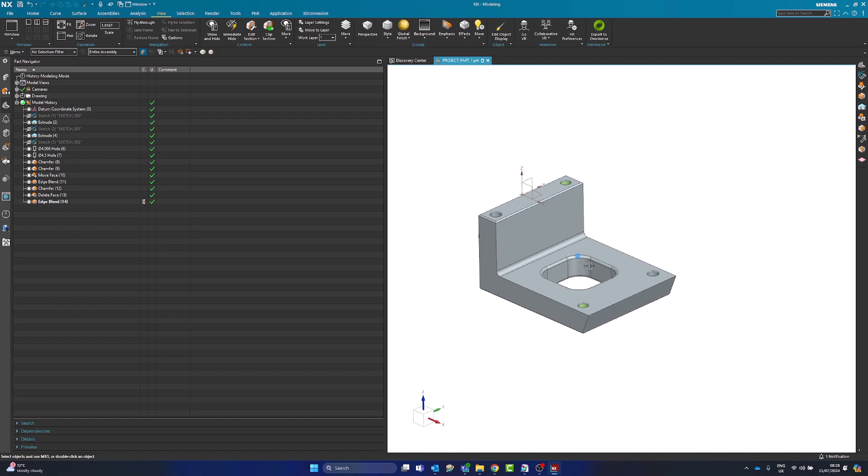And this is going to be a part that you're going to download and you're going to program completely on your own. There's nothing on this part that you haven't learned already, I believe anyway. It's relatively simple. It comes with a drawing. So if we download the folder from the OneDrive or Dropbox, sorry, then you'll see this information. So we have the main part, .prt.

If you're using NX2212 or above, then you can use this one, which I'd always recommend. And if you're using an older version of NX but are still following along with the course, then you can download the step model here and you have to import that into your session. Along with that, we have a drawing. So let's just give this an open. You can see there's a few things to look out for on here.

This hole here is datum A, and it's a 4mm H7 hole. You'll have to look up what H7 means if you don't already know, and see what tolerance that is. And then you'll see this hole here is also a datum hole. So it's 2 off, so this hole and this hole are 2. This one's not a datum hole, but it's a H7 hole, and it's referenced back to this hole. So you can see this has got an 025 positional to datum A and B.

So B is this bottom face. So basically this wants to be nice and parallel, perpendicular to the face. And then it also wants to be very good positionally to this hole here. So you'll have to go away and decide how you want to do that. And then other than that, there's not that much on here to worry about.

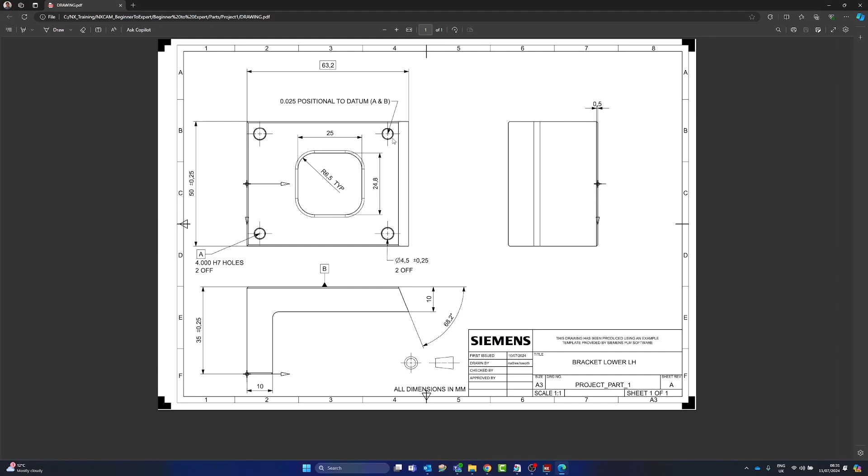And then this tolerance here that you can see in the box, this is just a reference dimension, because you can see this is actually a chamfer here. So this is just picked to the end of the chamfer. That's just there for reference basically. And then the other interesting thing here is I've added some project information. So if we open this up, a little text document, you'll see that I've just put a bit of information in here to try and simulate the differences of what could happen in reality.

So we have an order quantity of 200. So we're going to program this in a way that we are potentially running 200 of them. So that's something to bear in mind. Because if I was programming a one-off, I would probably program it differently than I would if I was doing a 200 off. You can get away with a little bit more in sizing and stuff like that if you have to size anything.

The machine that we're going to program for is a good quality 3-axis vertical machine. So what do I mean by this? What I mean basically is we're not using like an old Bridgeport with really bad servos that struggle to keep a size. We're trying to simulate what it'd be like in a half decent machine shop, so maybe like a nice DMG 3-axis, something relatively new. And then I've put a bit of operator information in here.

In the operator information, I've put here, sometimes the operator can be lazy when it comes to deburring and also checking finishing tools. So that's just something to be aware of. So you want to program it... Yeah, I don't want to say too much, but you want to think about this when you're programming.

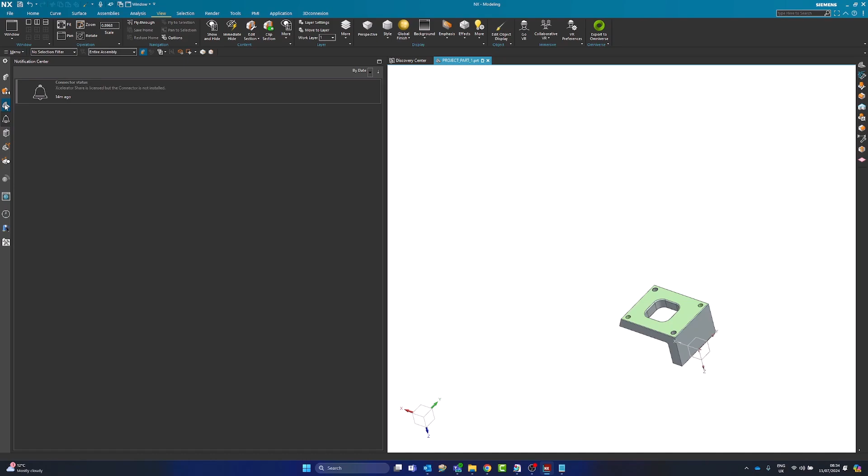Target runtime to manufacture complete. So I would imagine this part should take no longer than 15 minutes per component. So you can check that when you start the CAM session. Can't see it here because I've not started a CAM session, but when you're in the manufacturing session, you have all this different information in here. If you just pull this out, you'll see a time one, and if you look at the top level folder, it'll give you a runtime.

I've given you a stock billet size. So the billet size is going to be 3 inch by 3 inch by 2 inch, and there's going to be 205 billets. So there would be 5 billets to sort of quality control, let's say. And then a little bit of additional information. Your supervisor is really pushing for all components to be deburred on the machine. So that's just something to bear in mind.

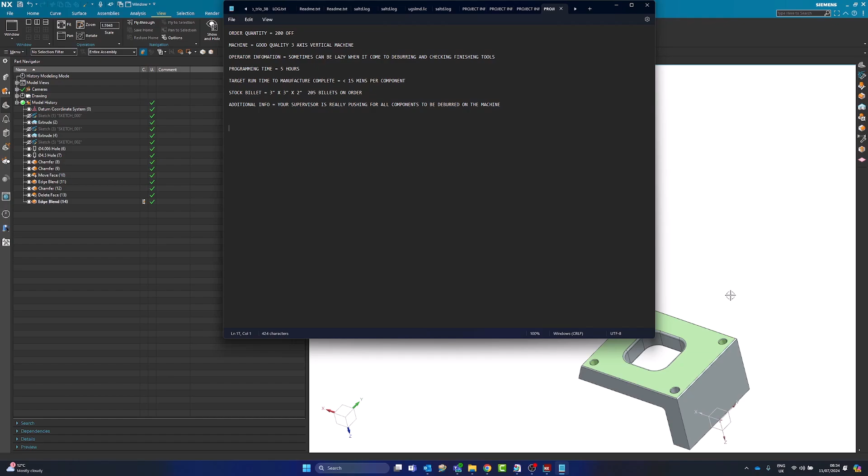So you see on the actual part, we do have sharp edges like here and here, these lines and this line here. So although you could finish this part and not deburr any of this, then the machinist would sort of have to take this edge off. But I think it's really good to get in the mindset of you don't want the machinist to have to do any deburring. You want to try and get everything done on the machine. There's no reason why you can't. So okay, so that should be it.

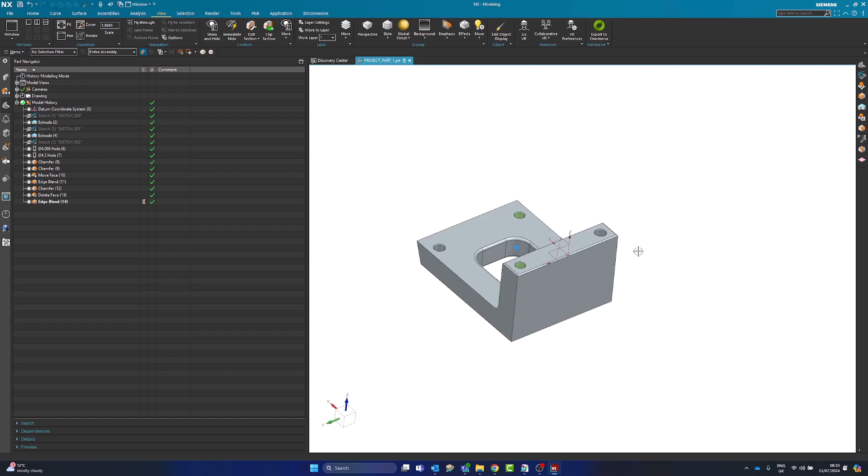And what I would like you to do now is go ahead, download all the content, have a little look over it. I'm not even going to show you like, oh, I would do this in op 10 and then this in op 20, op 30. I want you to figure that out for yourself, because it's important now that you get into the swing of learning for yourself a little bit. Although this course is trying to cover a lot of things, there's going to be things that we don't cover, and you have to start using your own intuition. I've worked for companies where everyone is working in a very similar way, and in order to separate yourself or do things differently, you're going to have to go out there and start learning for yourself and trying new things, and maybe looking like an idiot sometimes, but in that you'll learn, and that is definitely the best way to learn.

So yeah, if you struggle with any toolpaths, as I've gone over before, if you're in any toolpath dialog box, you can just hit F1 and it's gonna take you to the website and give you a little rundown on how that toolpath works. So the F1 key is definitely going to help you here.

And when you finish this part, I'd like you to send me an email. I'll put my email in the description of the YouTube, and once you finish all of your operations, so like op 10, op 20, op 30, however many you do, send me those files. I want to see your part files.